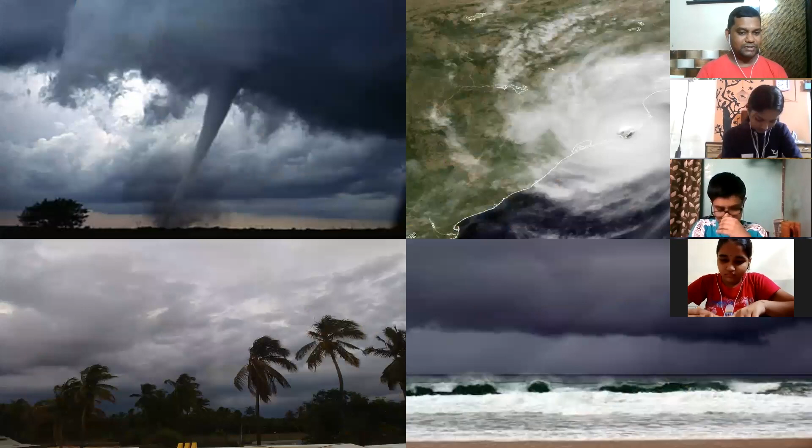So here when you say wind energy, simply speaking, whatever speed it might be, it is the air that is blowing. So when the air is in motion, there is kinetic energy. In different places on the earth at different timings, there are such conditions created where the air blows greatly, such as a thunderstorm, tornado, or cyclone.

You can see this kind of cyclonic circulation in weather conditions. The meteorologist, it also appears in the newspaper that this kind of cyclonic storm is developing in so and so region which will hit the coast on so and so days. Everyone predicts it accurately.

Just recently the country experienced a cyclone. It started from the eastern coast, Bay of Bengal, Orissa side. There is a name given to cyclones and hurricanes. The recent cyclone was called Gulab. That Gulab cyclone traversed across the eastern coast, passed through the mainland of the country, reached the west coast, and now it has moved towards Gujarat.

So here we are looking at this as a source of energy, because wind is always going to be there, and it is always going to have kinetic energy. So why can't we use it? It has been used since ancient times also.

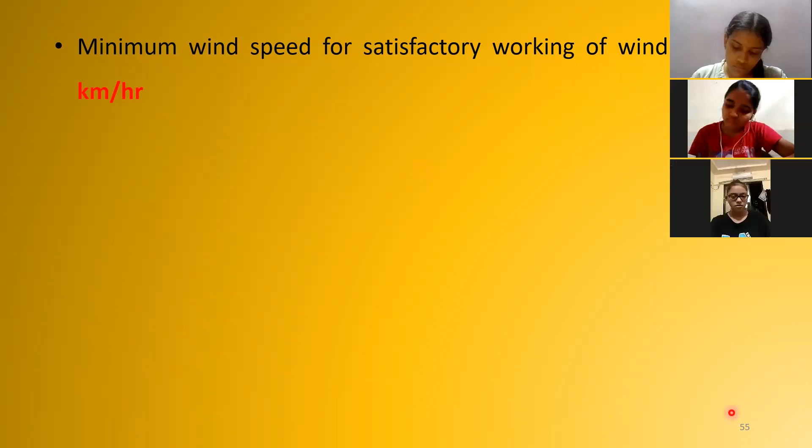So for the satisfactory working of a windmill for electricity generation, the minimum wind speed needed is around 15 km/h. This minimum speed should be there, then the electricity output is efficient. Otherwise the investment is a waste - that windmill will just become a showpiece there.

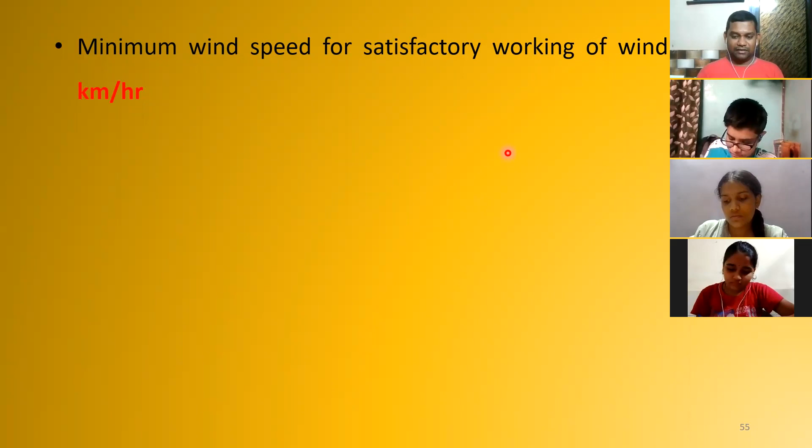Then it is one of the most environmentally benign energy sources. Based on this understanding till now about a windmill, do you think it will cause any pollution? Can this cause pollution? No pollution, because nothing is burnt, no emission of gases, nothing.

So it's environmentally very benign, and we are not generating the wind either. Wind is already there, we are just using it.

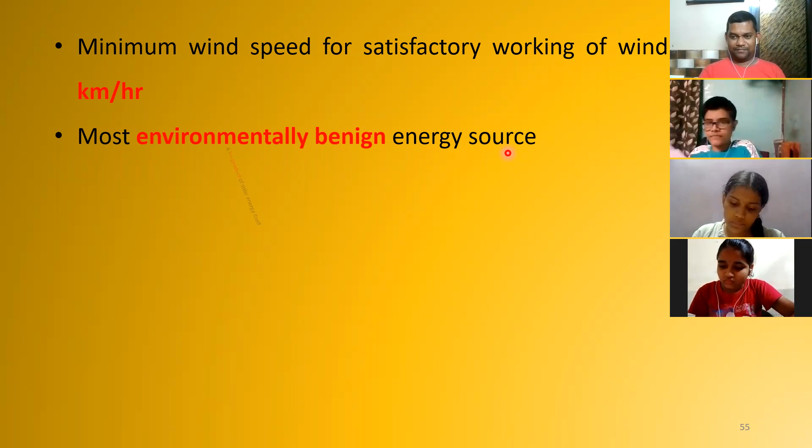And when you say wind, the very basic question again comes into picture - we say the air which blows is the wind. So why does the air blow? It is because of solar energy. Because of the sun's heat and temperature, the wind blows in a certain direction. So if you look at it from energy terms, then wind energy is a byproduct of solar energy.

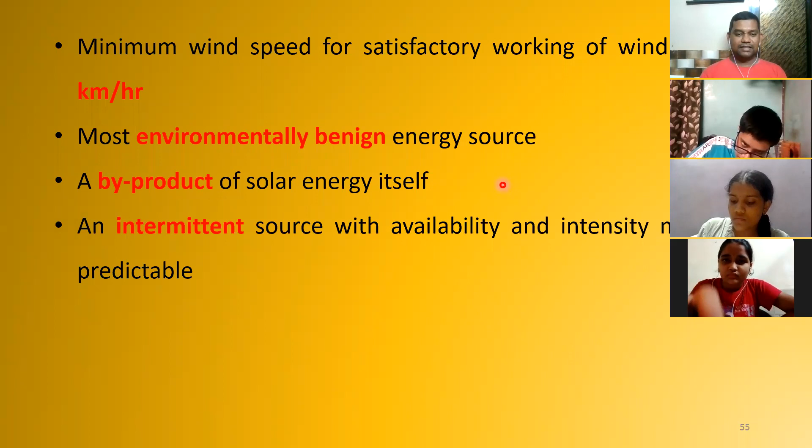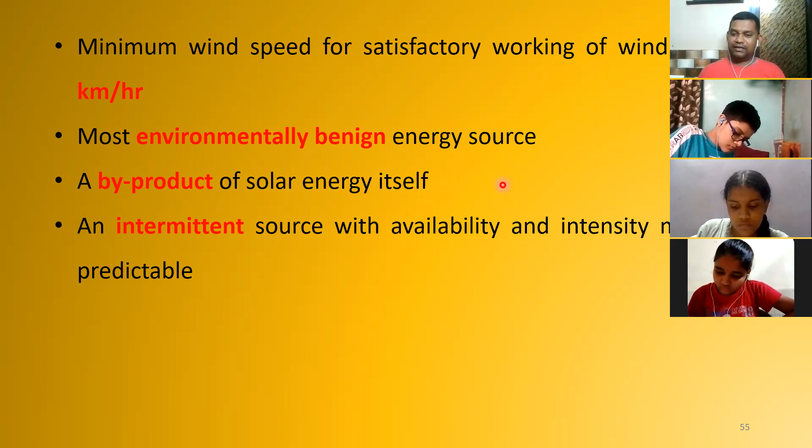Getting it? And it is an intermittent source, that means you cannot predict that in any given place you will always keep getting wind energy throughout. Sometimes you may not get it. So it will come and go, and how much speed it will come with is also very unpredictable. That's why it is an intermittent source.

And windmills were also used in the olden days, it is not a new technology as such. Yes, there are modifications where we use different technologies, but its previous versions are also written about by Arab writers way back in the year 1000 AD - even then they used windmills. So we just have to use that again.

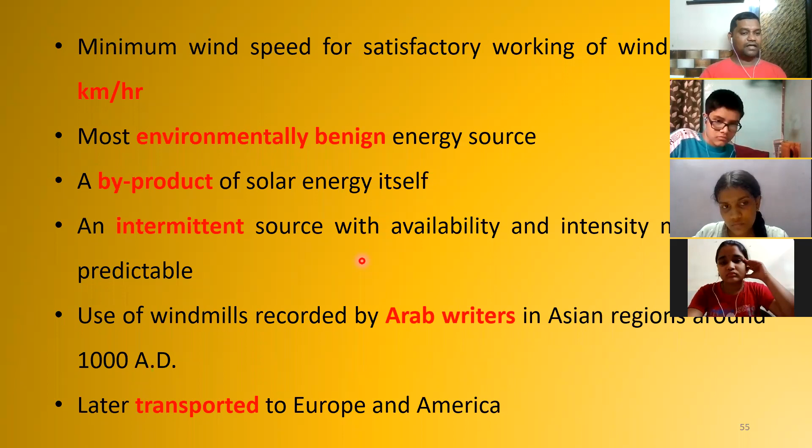And then from there in the Asian regions, it got transported to Europe and America. That's how these windmills were used, and that's why we have to tap these sources. You can understand that if we use more windmills as a source of energy, we can reduce the dependency on coal and fossil fuels.

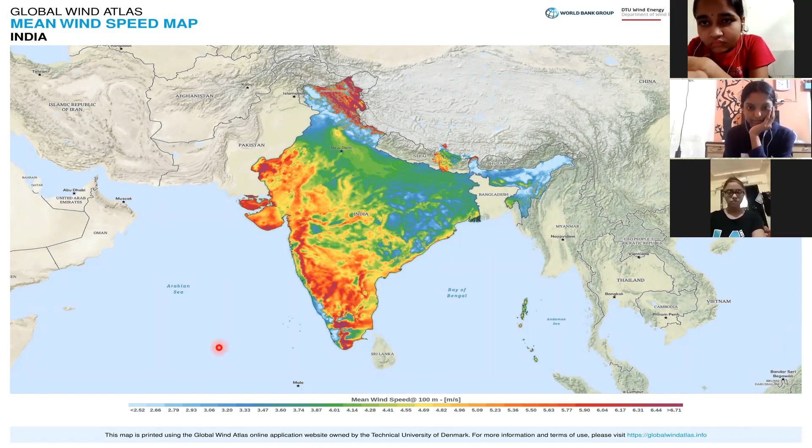This map is showing you something. If you focus on our country, these different colors on the map show what approximately is the speed of the wind throughout the year. Look at the scale below, mean wind speed. The bluish shade means the wind speed is very less. The center one is green, and orange to reddish region means very high wind speed.

So now based on that, look at the map. You can see that especially Rajasthan, Gujarat and the western part of our country generally receive very high wind. Central peninsular region of India receives moderate wind, and the eastern part of our country has got less wind. Of course, there are certain small pockets, like on the Sikkim side and the Ladakh side, there is wind. So different regions of the country have got unequal distribution of wind on an average throughout the year.

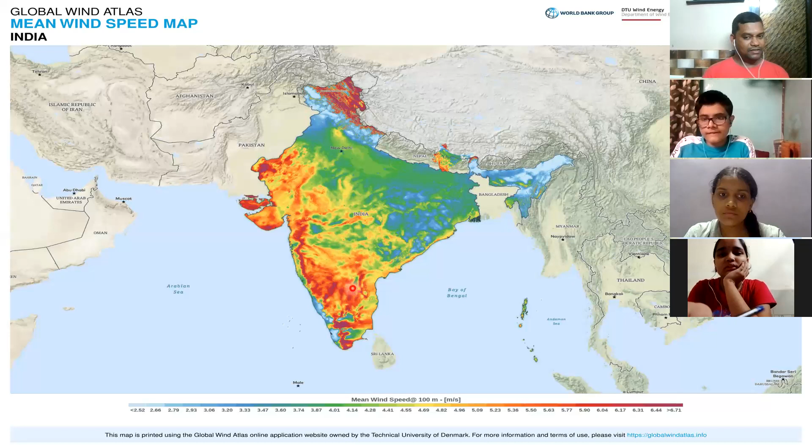So if this understanding is there, according to the global mean wind speed map, one can plan which areas will be suitable to build a windmill or a wind energy farm. Especially in the southern part of our country, you can see there are very heavy winds in this region. Getting it? This map is giving you that idea. Understood this map? Mean speed, okay?

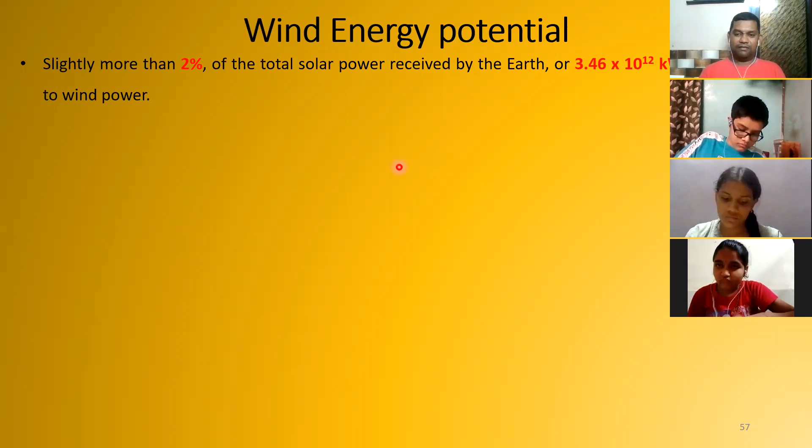So, potential of the wind energy. It's like more than 2% of the total solar power which is received by the earth is converted to wind power. As much solar energy that comes in, more than 2% of it. And ultimately when you say wind, it is nothing but mechanical energy.

So it's like, if we see the potential, if we properly used both solar and wind, then the amount of energy that we can get is more than 2 million times more than the total energy from all sources used by the human population in the year 2010. So that means if we properly use these two, solar and wind, we don't need to use any other source at all. That's how much potential it has.

In our country, considering the availability of wind, the potential is estimated to be about 48,000 megawatts. Good amount. And the maximum wind speed is in the southern part of Tamil Nadu. So there is the largest wind farm in our country, in India, which is near Kanyakumari in Tamil Nadu.

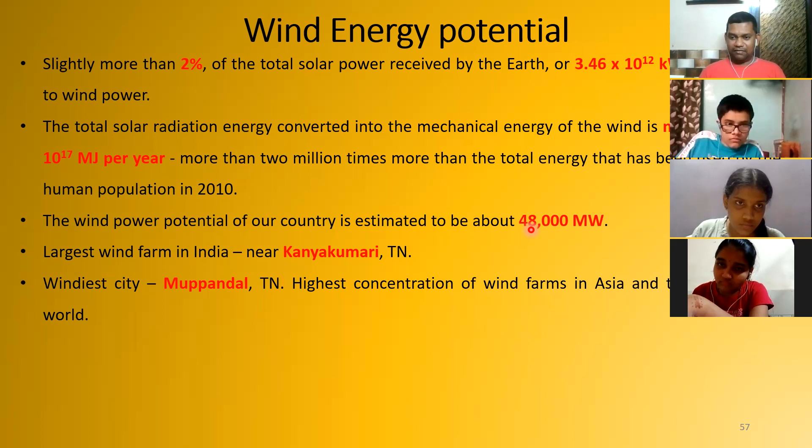And the windiest city in our country is a place called Muppandal in Tamil Nadu, according to the average wind speed I'm telling you. It has the highest concentration of wind farms in Asia, and also the third highest in the world. See this, that's a place near Muppandal in Tamil Nadu.

This is a very big wind energy farm, very nice wind, near Kanyakumari. That is the place, so you understood how much potential our country has. This is a very outskirts of a small village that is shown. You can see the wind energy farm in the background, an open area. The name of the place shown is Aralvaimozhi, near Kanyakumari. This is where you get the maximum wind energy.

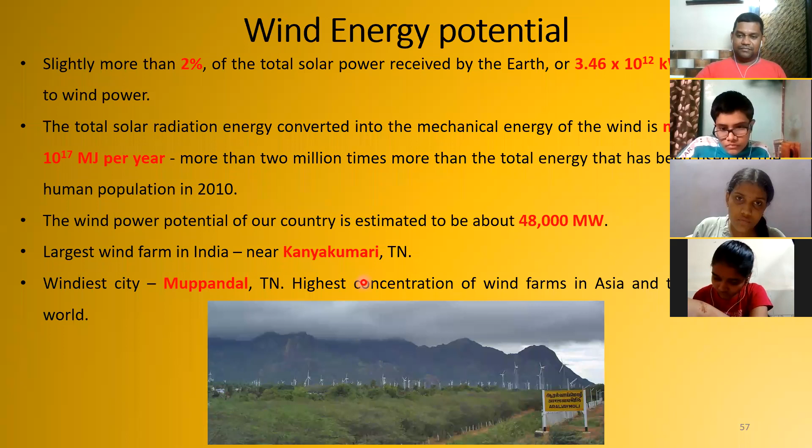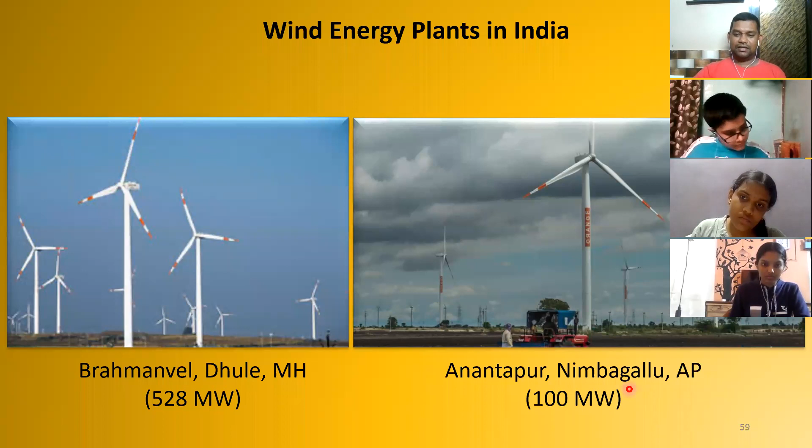So there are some small and large establishments which are there.

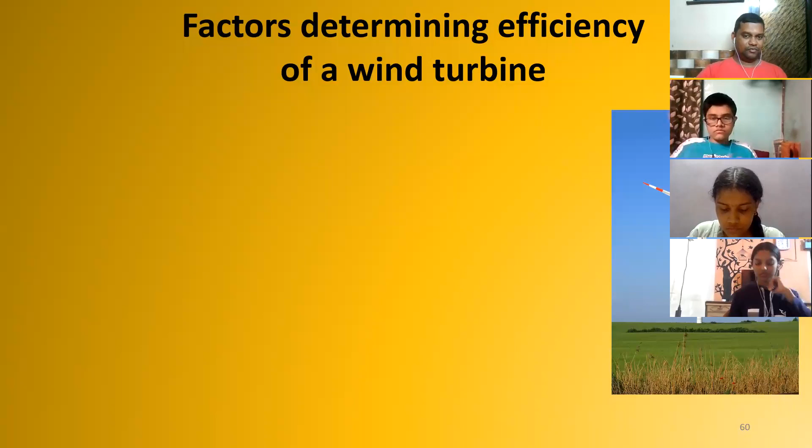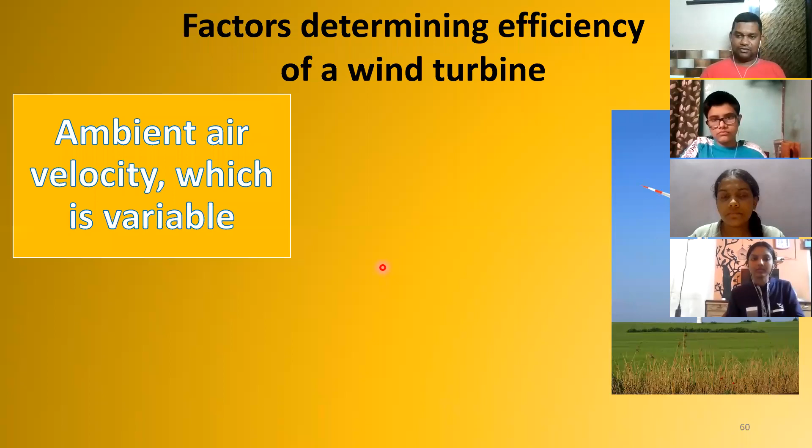If you talk about the efficiency of a wind turbine, what are the factors? Firstly, ambient air velocity - what is the wind speed, how fast or slow it is moving? But that's a variable factor. So wind turbine efficiency depends on this.

Secondly, the rotational speed design and the construction of the windmill - the material used to build it should be such that when the wind rotates it, there should not be friction, and it should not be a heavy material that requires the wind to work too hard. Otherwise it will be a wastage, so it has to be a lighter material.

And the speed design also. Type of the wind turbine again depends on the number of blades - like here in the picture we see 3 blades, sometimes there can be 4 or 5. It depends. Also the size of the wind turbine or the blade diameter.

Sometimes the windmill or blade can be small, sometimes the blades can be long. It depends upon the locality, how good or efficient the wind is. If the area receives a really good amount of wind, then large blades can be used. These 4 factors basically determine the efficiency of a wind turbine.

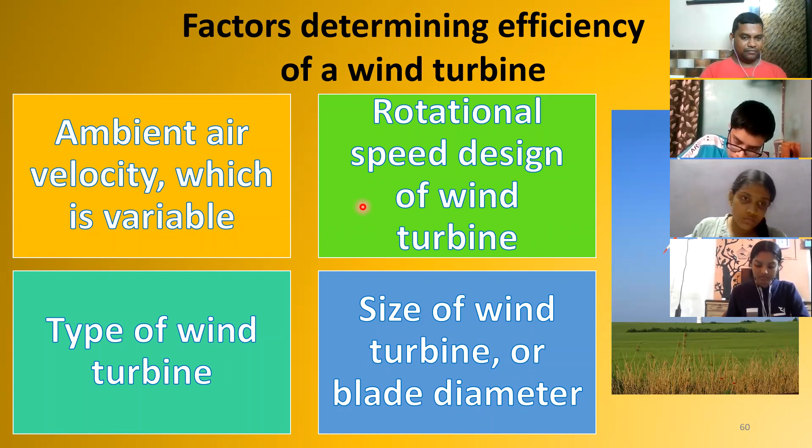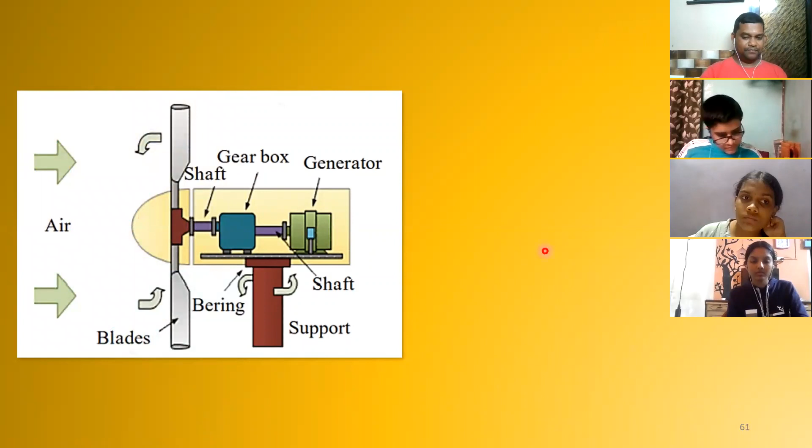Now look at this construction of a windmill, its components, and how it works. Look at this construction diagram - there are the blades. What are the parts of a wind turbine system? You have blades, and the main tower which gives height to the windmill. Blades are exposed at that height because building it right at ground level makes no sense - it has to be a tall one.

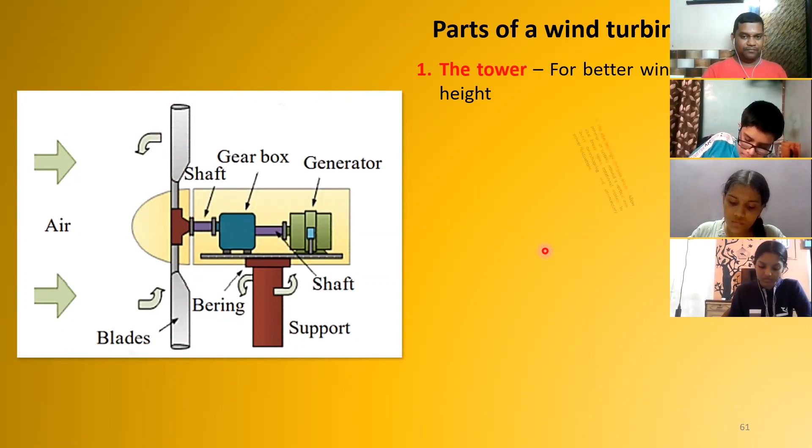There is something called yaw bearings and a yaw brake - this is what allows the blades to rotate smoothly. It's like a 2-wheeler or cycle wheel, rotating around one axis, so they rotate smoothly, and there should not be any overshooting or unnecessary power fluctuations.

The rotor blades are the main part which rotates. It can be around 30 to 100 meters in diameter, according to the requirement one can decide that.

Aerodynamic design - I can explain it like this. Aerodynamic means it is pointed towards the tip. Because when it is pointed towards the tip, the friction generated due to the wind will be less and it can rotate very well, smoothly. So whenever the wind blows, even at the slightest velocity, the blade will rotate because it's aerodynamically designed. Getting it? That is the meaning.

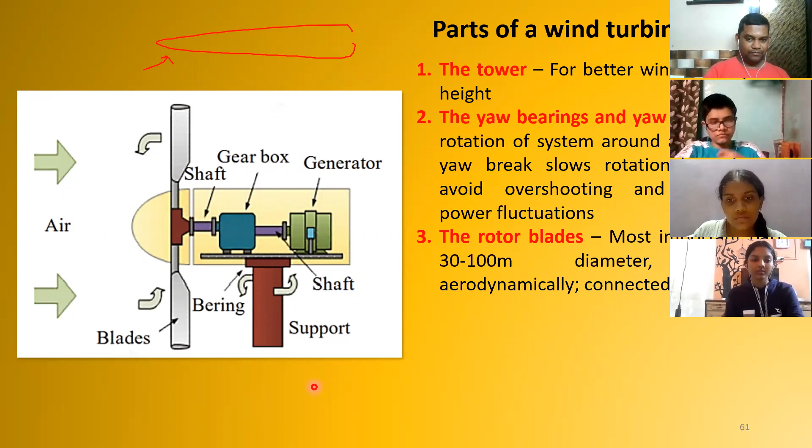Friction has to be least. Understood this point? Yes sir, yes sir. Then the gearbox - see how the blades are connected to the gearbox.

This will amplify the rotational speed, it can reach up to 2000 to 3000 RPM, and then it can transmit that power to the generator.

Look at this construction - here is the axle, yaw brakes, and the blades rotate. The gearbox works like gears in a car to increase the speed - the same gear here increases the rotation speed of the blades. Because of this rotation speed, it will then be connected to the generator, which will ultimately convert the movement of the turbine into generation of electricity - same principle.

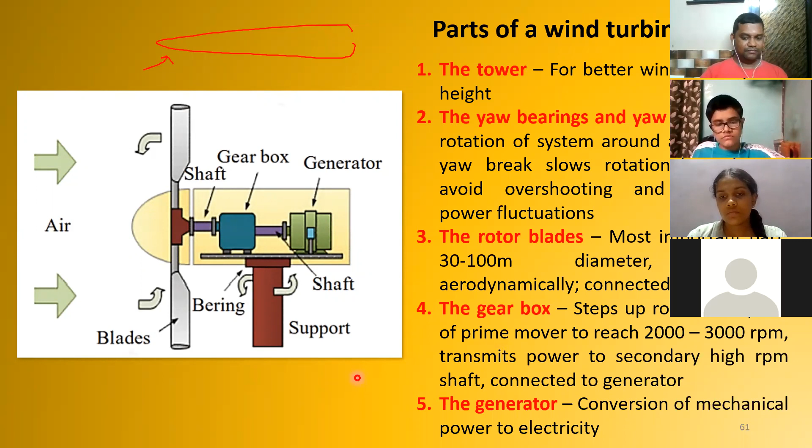So these components of the wind turbine system are necessary. If all of this is proper in the windmill, then the windmill is very efficient. Are these points clear? Yes sir.

According to the locations where windmills are established, you can see that for residential areas, if established at the home level, a blade length of 1.5 meters is enough, and electricity output is around 2 kilowatts. Small scale windmills are used, and the height is also not very high, around 100 feet or more, enough for home level.

If it is for a wind farm, you can see a taller windmill, about 400 to 500 feet, with a 50-meter blade and 2000 kilowatt output electricity.

And if it is for really large scale, permanent, offshore wind turbine use, much away from residential areas, then they are grown really long with longer blades, 100 meters, and electricity output is also equally high. So blade length and windmill height both determine how much the electricity output is.

So according to the requirement, one has to design what should be the height and length of the windmill. Is it clear?

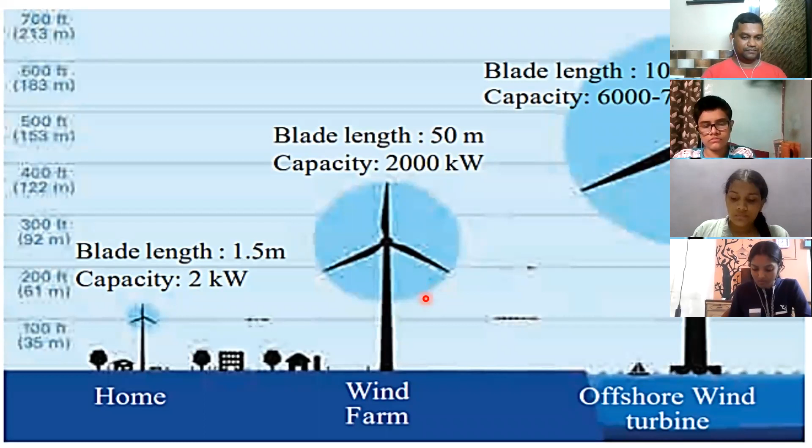Now talking about the environmental impacts of wind power - based on everything discussed, as you said a few minutes back, that it does not have an impact on the environment - do you still agree with that? Does it have any impact on the environment?

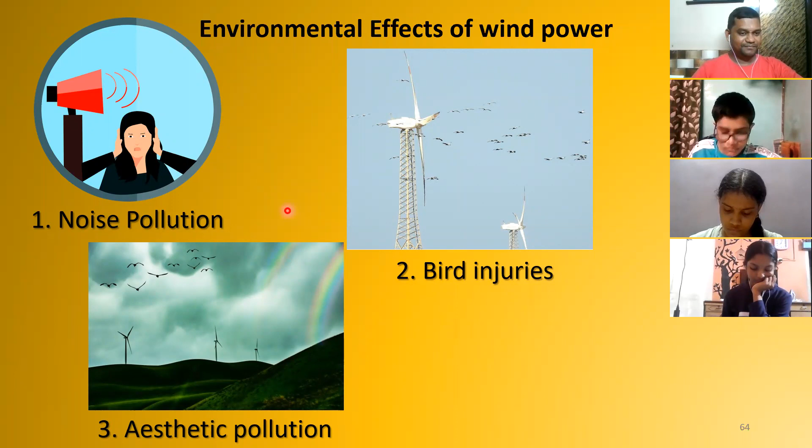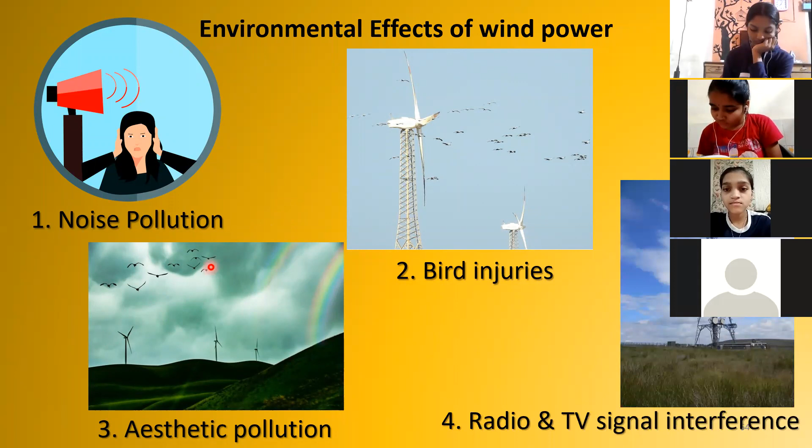Okay, and it can also interfere with radio and TV signals. Installing these windmills can cause interference with radio signals, communication and TV signals. So again, for that reason it has to be away from these kinds of structures. Nowadays these radio and TV signals are very necessary, even mobile towers, so their effect is not good, but that can be avoided.

Understood this? Any doubt in wind power? Okay, so with that we have completed wind power as a renewable source of energy.

Now if you think again, the name of the lesson is 'Towards Green Energy'. Are you able to understand the meaning of the name of the lesson in this context? Energy sources which are eco-friendly, not damaging to the environment, are called green energy. So from the conventional sources we are going towards eco-friendly sources of energy. That's what we are looking at. Okay.